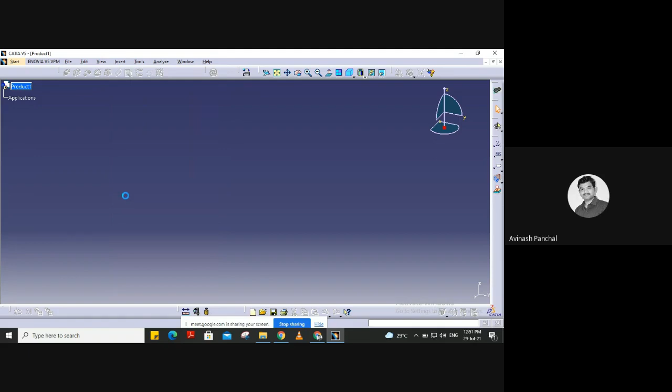First of all, I will go for insert, to insert the created component. We already have this created, so insert existing component. After clicking on the existing component, we need to click on the product, because in this product we want to call that component.

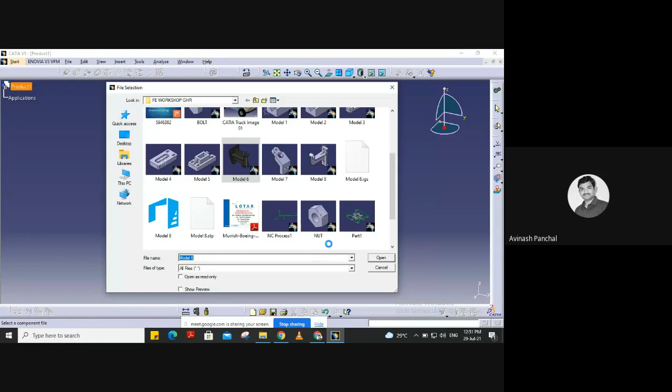First of all, I will call this component. This is the base component, so first we will call only the base component. Open. Yes, it has been opened now.

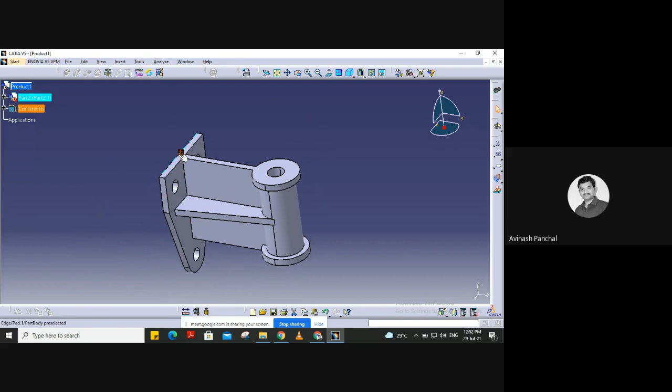First of all we need to fix this component. How to fix? We have this constraint, that is the fixed component constraint. Select this whole component. So it is fixed now, because we need to give some reference.

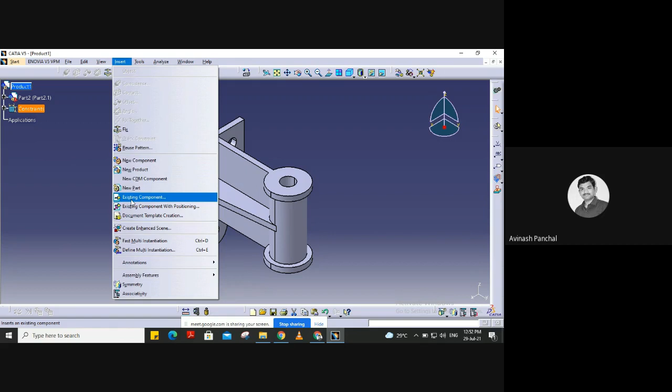For giving this reference, we need to fix this first, and with reference to this we need another component. I want to join the same part in the opposite direction, so I will call the same component again, an existing component. This same component I will call again, so it will be merged.

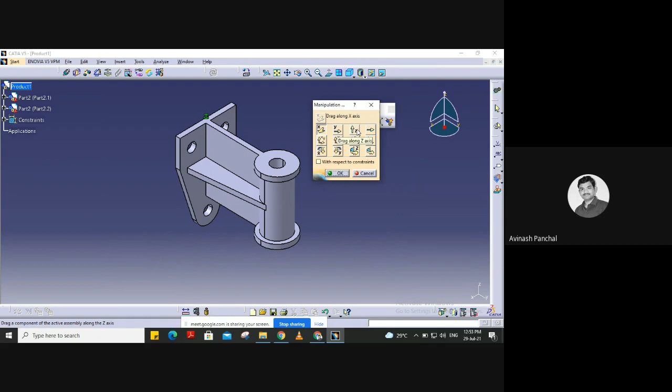First of all I will go for this move, in that I will go for manipulator. Manipulation: these are the different kinds of x, y, z axis. Along that axis this component will move.

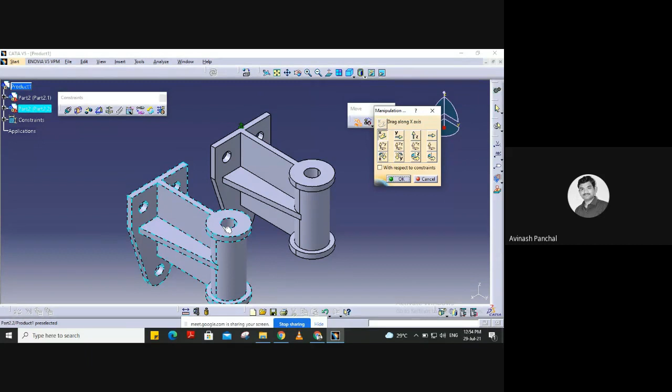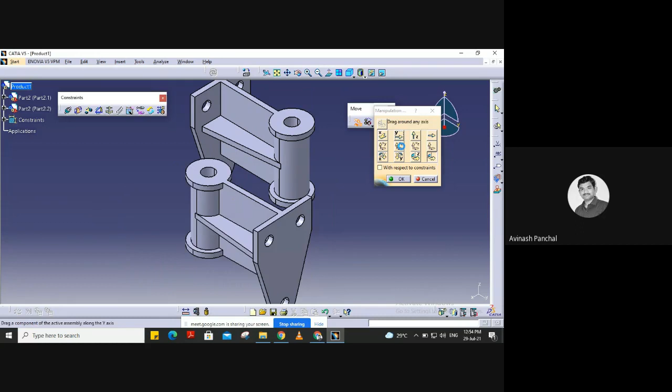We want this component in the opposite direction, so I will just go for this drag around any axis. I will select this axis and rotate this component in this direction. Click on OK. Now I will again manipulate this according to the y-axis.

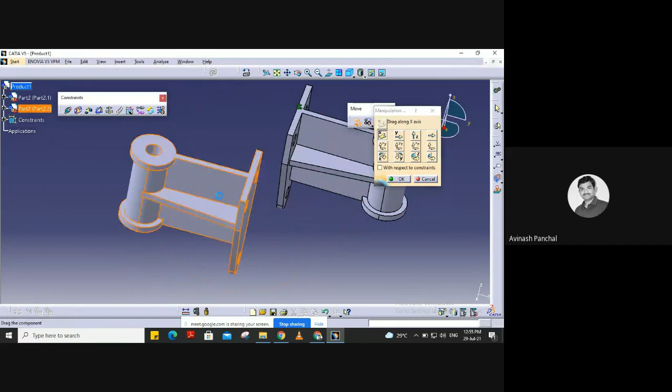So there are some constraints. This is the coincidence constraint, I want to give this constraint to this component here. So coincidence I will give for these circular portions.

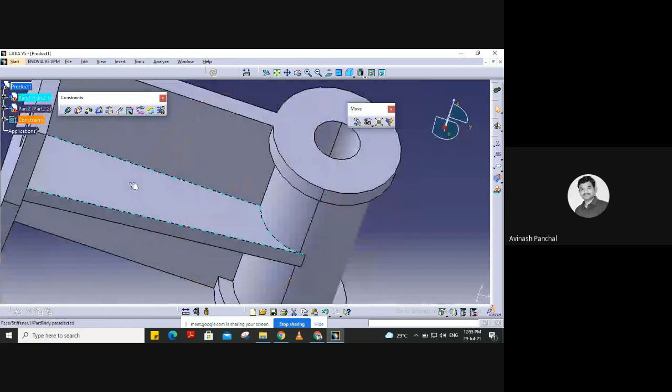See, these have become line to line. Yes, now we can go for the face to face constraint, that is called the contact constraint.

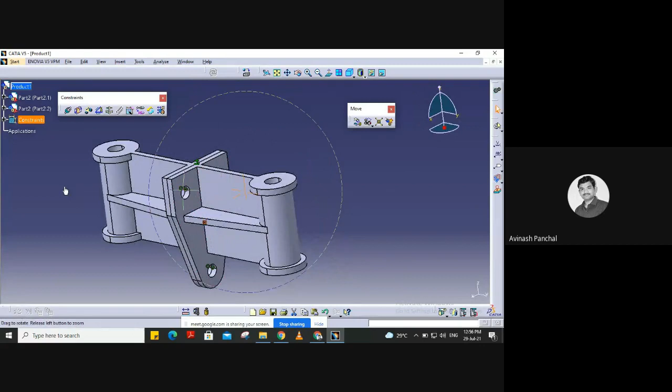Applying the bolts, nut and bolts over here. I will again call insert existing component and I will call bolt over here. So this bolt is seen over here. Now I will place this bolt by manipulation to z axis vertically. I will move that one.

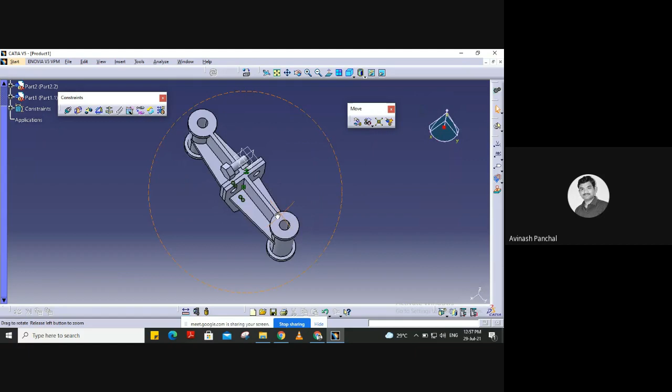So now this bolt will be kept over here. First I will create multiple copies of this one. So this is part 1, that means it is the bolt one.

So this bolt we can copy over here, control C, and I will again go for the product and control V - part 1, part 2. Again I will go for product 1 and again I will paste over here. So there are 3 bolts available now here.

We can see here in this x direction we can move them. These are the 3 bolts. We can use this for applying to these 3 holes. So I will first go for the...

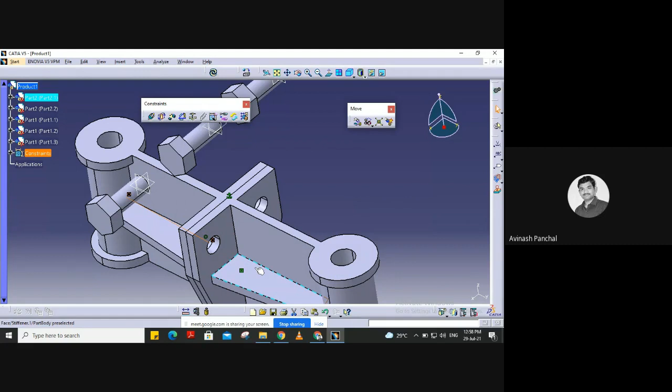Yes, here we can go for the axis to axis constraint. Here also I will go for this one, axis to axis, and for this one as well.

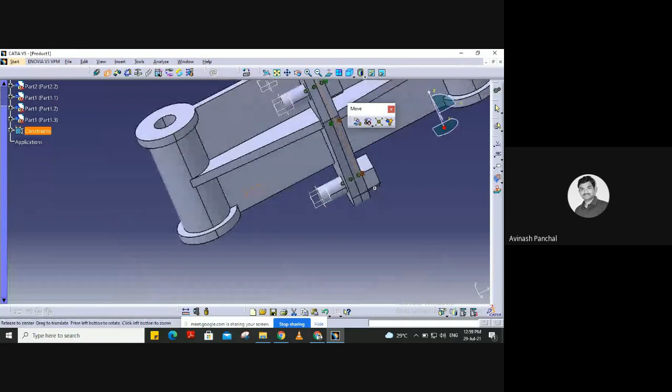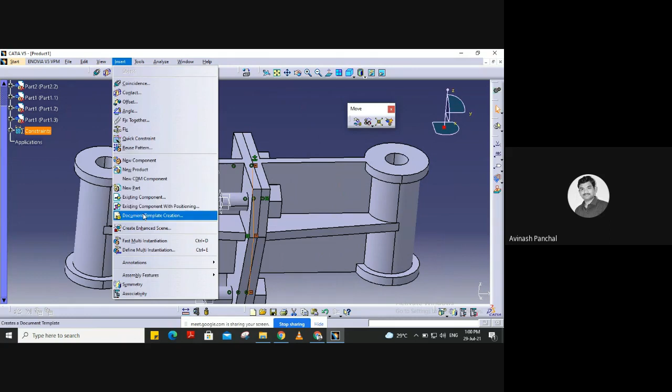So now I will call the next component, that is not an existing component to this product - I will call this the second part.

If this type of pop-up window is coming over here, so the same name will be there - part name will be part 1, so I will rename that part as nut 1. Click on okay. So I have renamed that part 1.

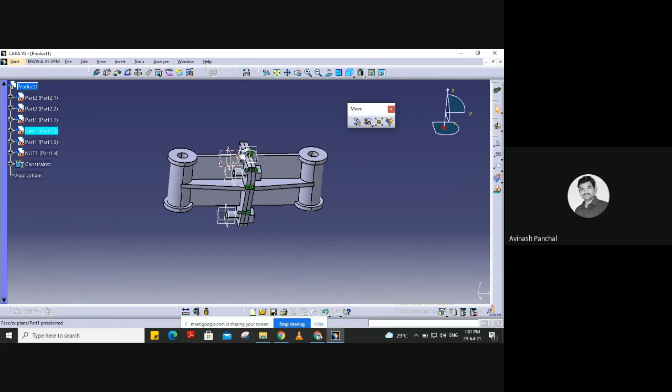So what I will do - I will give constraint to this. I will keep it aside and give this constraint for this one. And update.

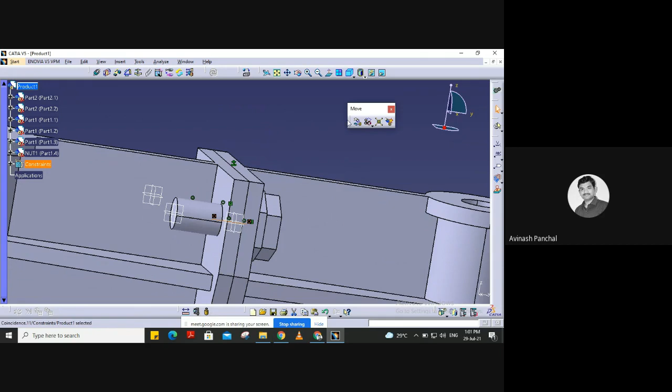So now it has been moved in this direction. We want it in this direction and in this direction. So I will do one thing - I will keep multiple copies of this nut. Control C and go for Control V, Control V.

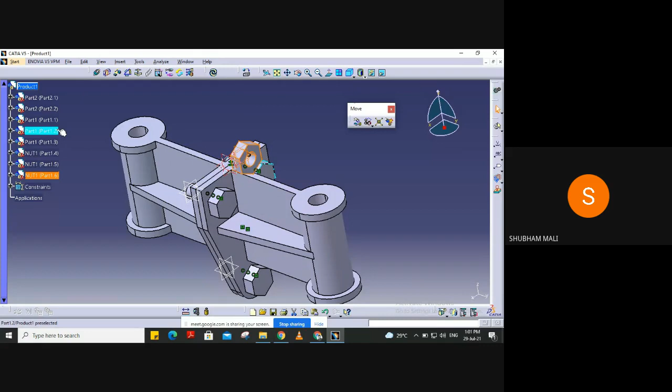Again we can go - sir, tell us about the project, which one do we need to do? Yes, yes. Have you given the project? Yes, we will talk about it after this lecture. Okay sir, thank you. At the end of this lecture. Okay.

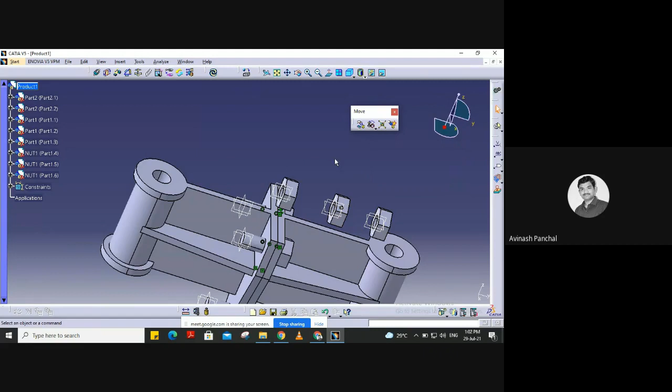So what we will do, we need to move this. One by one we will give the constraints. That is your coincidence constraint. This is already constrained.

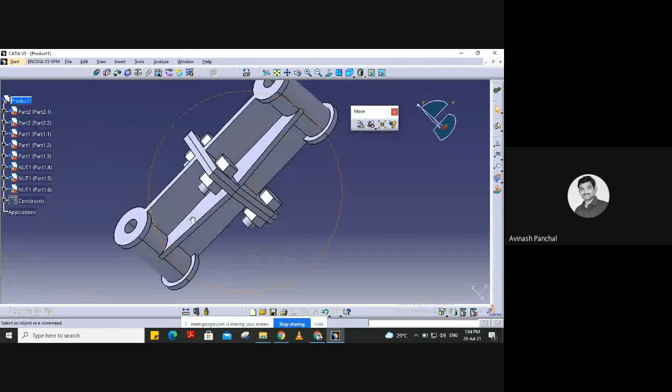Okay, this is what your product looks like which is assembled. Okay, have you understood?